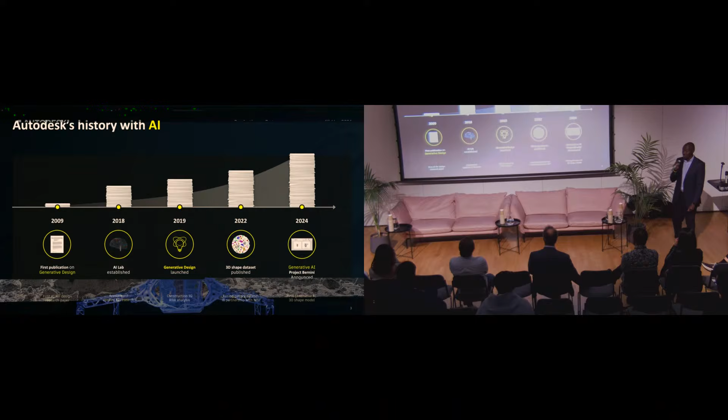Autodesk has a long history of developing AI. While it might seem like a new technology in the architecture, engineering, construction industry, we have been exploring what AI can do in product design, in building design, and other domains, including media and entertainment. We've got over 15 years of investigation and publishing papers as well.

In 2009, the first publication on generative design was released, and this was very much the beginning of a lot of the work and focus. Then in 2018, we created an AI lab, which was the beginning of accelerating a lot of our AI investigations, specifically for design and make.

In 2019, the first generative design capability was released, and this was Construction IQ, to assist with risk analysis and safety via the BIM 360 application. We've since released other generative design solutions, both in Revit and in Fusion since then.

In 2022, we published a public dataset - the Fusion Gallery dataset, in partnership with MIT. Again, this is work that came out of the AI lab.

Fast forward to 2024, the first 3D shape generative AI model was released, at least as a research project called Project Bernini. This was a publication that was then formalized as an actual working solution and demonstrated in some of our external engagements. Now we're obviously in 2026, and a lot has changed in just the last couple of years.

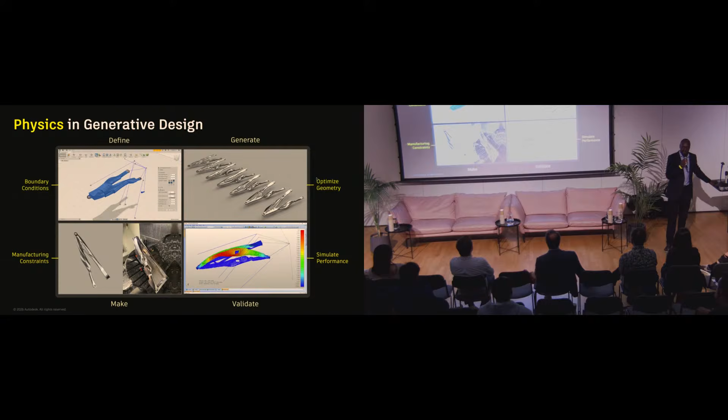In this case, generative AI is assisting with preserving accuracy and, in fact, improving it in many cases. So you can get your work done better and faster, certainly, because it takes a fraction of the time to generate constraints versus doing them by hand. Consider that performance is a key contributing factor here for generative AI.

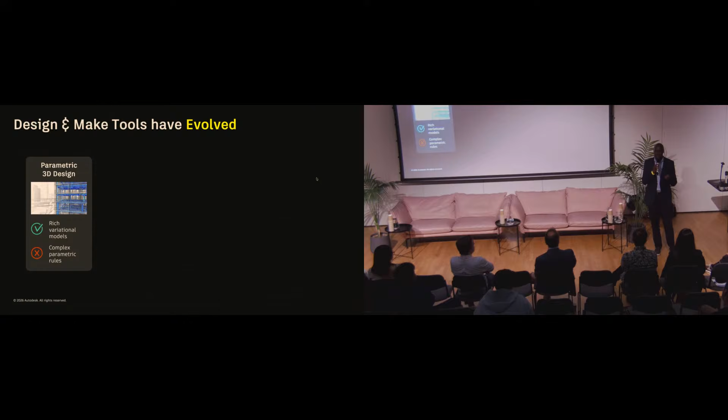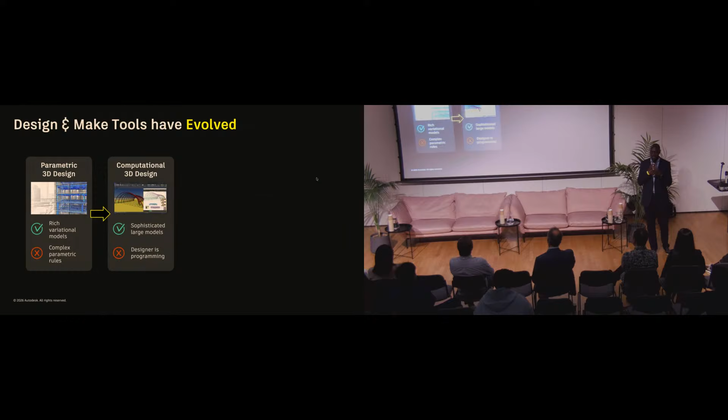But you had to define parametric rules, like in the auto-constraint method, defining edge lengths, equivalent ratios, and building up all these rules to create fairly complex geometry. We then moved on to computational 3D design, where you provide programmatic rules for how to create geometry. This is like going from maybe 20-30 years ago to 10-20 years ago in terms of the technology. We can now create very sophisticated large models, but as designers you need to learn how to program these types of rules. So the designer is still programming in this case.

You need to really understand deeply how to use these tools, which unfortunately leads to a situation where not many designers have taken this on because it's very complex. It only appeals to specific advanced engineers who can really leverage this tool to the max. But herein lies the opportunity, right? As AI powers 3D design, we're now in a situation where you can leverage AI to analyze what you're doing.

AI can automate some of the processes, like the auto-constraint step, and also augment your capacity. You're now able to work much faster as you combine these tools together. With generative AI combined with generative design, you're getting performance and productivity gains, as well as performance geometry out of the system. Together, you're able to work a lot faster and improve what you're doing. And importantly, with generative AI, it's a very interactive but very natural approach to doing design. So that's the path we're all taking - software continues to evolve, but this is where we're at today.

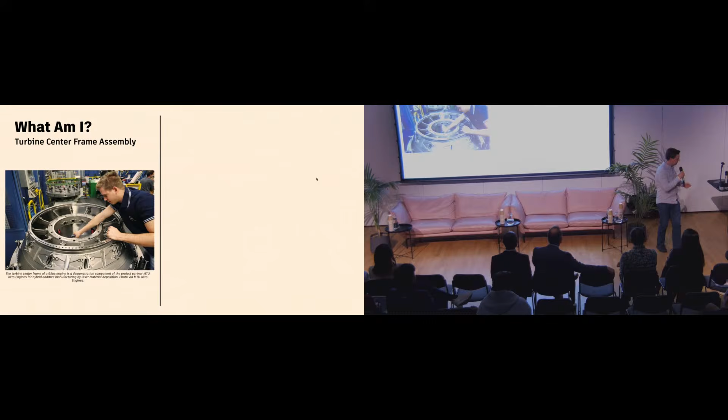This is where the turbine center frame is located. It's located towards the rear of the engine. It holds the high speed and low speed spools together. It has a very high precision bearing in the center. Around the outside, some of the components that are not shown, but you can see those struts in the middle. There's some ducts that sit around the outside. Those feed air into the center and oil to lubricate and cool the center bearing.

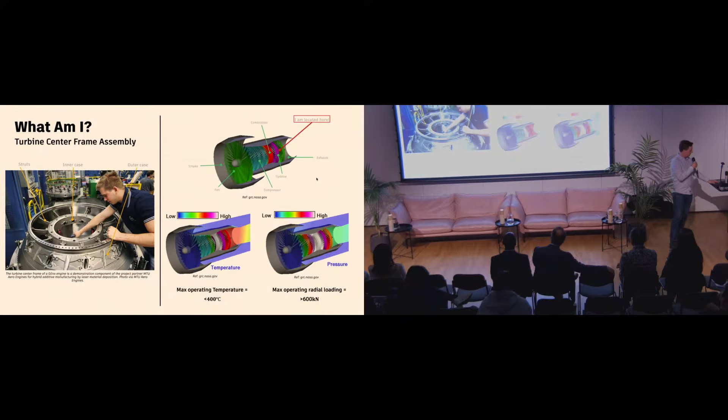You can see here where the component is located towards that rear section of the engine. This is the stages we went through. We got loads of requirements, models from MTU Aero Engines. We wanted to look at how we can apply multi-physics generative design to this. So we're not just doing structural analysis, we're doing thermomechanical, we're doing CFD analysis, and we're trying to combine it all together into one system.

We had to go and build this component, test it. We worked with the universities to do that. We did some proper aerospace level testing as well, because these guys can test parts for jet engines. And then we go and build it. We built this whole thing. You'll see it at the end.

We went through a number of design iterations. We had to evolve the design slowly - build it, design it, simulate it, build pieces of it, and then test it, learn from that, and then improve the design iteratively. And as we went through each stage, we met more and more of the requirements until we got to the end, where we met all the requirements.

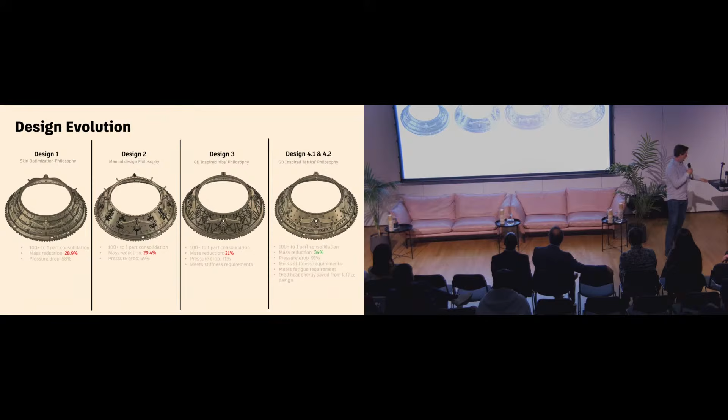The first stage was to look at some generative design. We wanted to understand a little bit more about the structural performance of this. Can we add - where do we need to add material? Where can we take away material? And this is where generative design suggested we could add some material to this component.

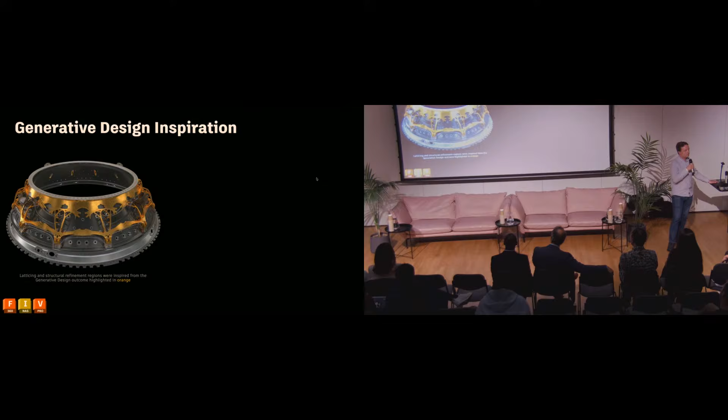You can see the structure there where it's added some material towards the bottom. Actually, later on, I'll show you that we actually made this a bit of a sandwich panel, so that top section of extra material just got absorbed by that sandwich panel, so it wasn't needed.

We added a lattice. This is a really complicated lattice. It's a double conformal lattice. It conforms around the shape and at the angle of the shape. And the lattice is also optimized - it's varying thickness.

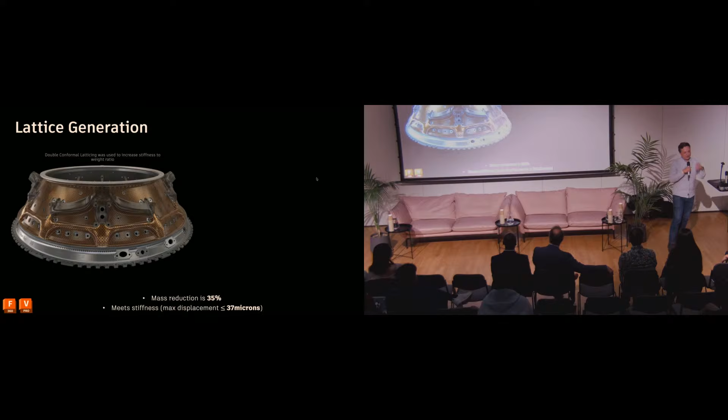This enabled us to get a mass reduction of 35% compared to the original component. It met all the stiffness requirements. This is the over 100 components merged into one that you can see here. When you do that, you merge a lot of functionality of components together as well, which is why we had to take this multi-physics approach.

There's a close-up of the lattice structure. You can see right in the middle there it's optimized. It's varying thickness.

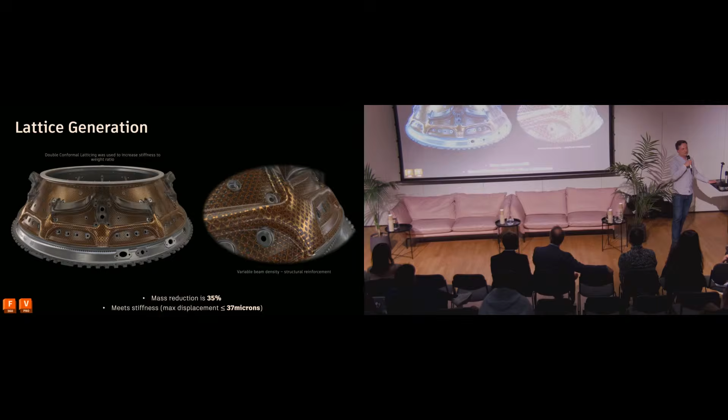We had to do some extra analysis on this, as well as the structural analysis, to work out the displacements. There's a fatigue requirement as well, so it's thermomechanical fatigue testing we had to do for this. It's basically as it heats and cools during its flight cycle, you grow cracks slowly. So you want to make sure you don't grow them too large before the end of the life of the engine, or the expected end of life.

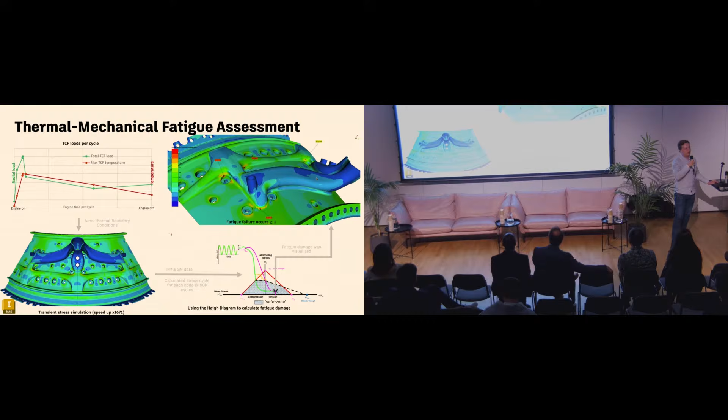So yeah, it's a cyclic load that increases and adds tension to the material.

Okay, so this is the next kind of physics, CFD. We had to do some generative fluids. This was actually the most prototype tool that we had that is now in the product, but you could do fluid optimization. We had to do a lot of testing for this because originally it was designed for mold tools, for liquids. We wanted to adapt this to now work with air, so we had to do a lot of learning and gather a lot of data to improve that solver.

You'll notice that section is actually attached to the body. In the original part from GE, it's not, it's just floating - it's a parasitic weight that adds nothing to the structural performance. So we've combined it on there to make it easier for additive manufacturing and also add to the structural performance of the component.

We got a pressure drop reduction of 91% because we've got a nice free-flowing shape, with very few eddies and turbulence within that volume that you can see there.

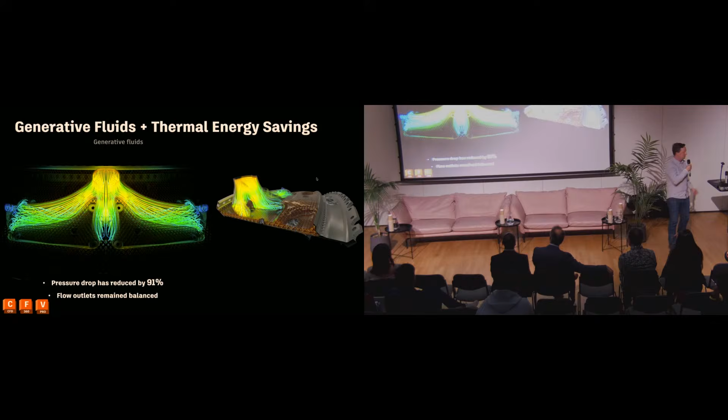And then the last bit was this sandwich panel that we added. It's really good for additive manufacturing, especially with a powder bed laser process, so you get a lot of heat in there. If you use thinner structures and lattice bodies, you reduce your distortion. But it also, in this case, because it's really hot on the inside, it reduces the energy loss through the casing. So we saved, over the lifetime of the engine, 16 gigajoules of energy.

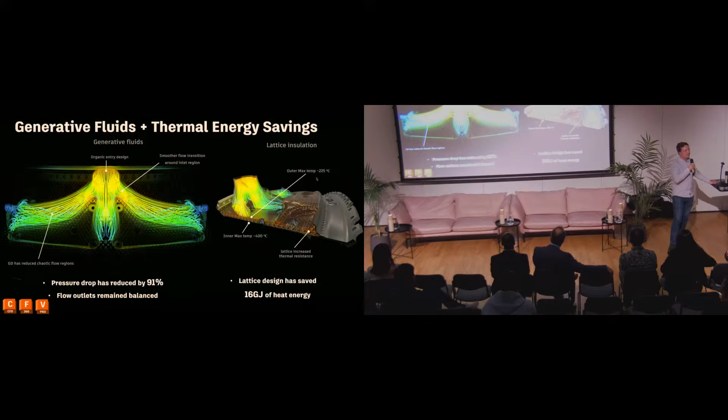And where we need to tweak things - what information can we pass back to the science team that are working on the solver to improve their stuff, to make it work better with air?

It's a very loud test. I do have a video, but not here. It'll deafen everyone.

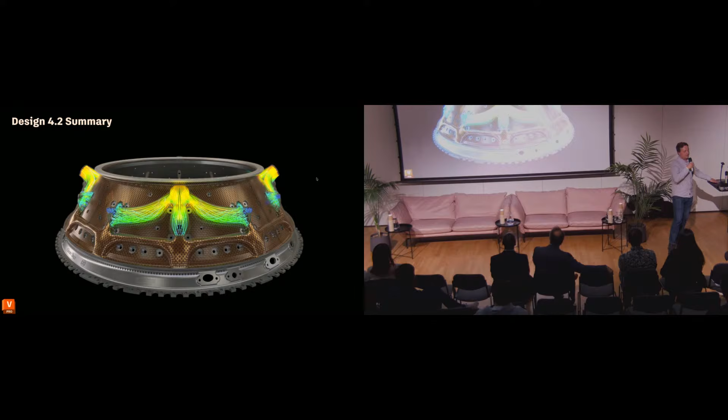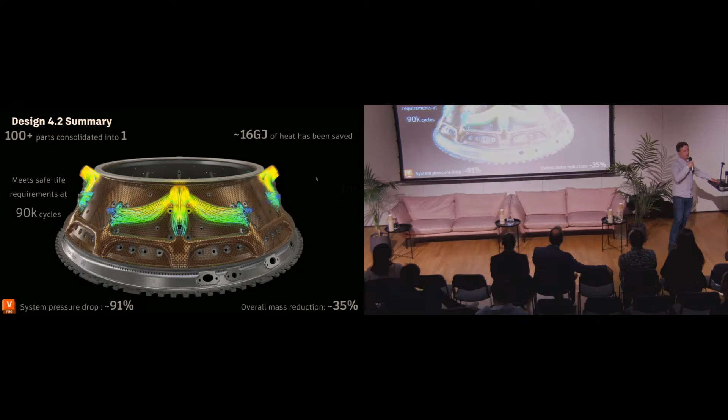So yeah, that is the overall design that you see there. They made this - it's 1 meter in diameter, completely made out of Inconel. So it's 100 parts combined into one. Mass reduction of 35%, system pressure drop 91%, so you need a smaller pump for the air. It met the 90,000 cycles fatigue test, the mechanical test. 16 gigajoules of heat was saved, and we printed it.

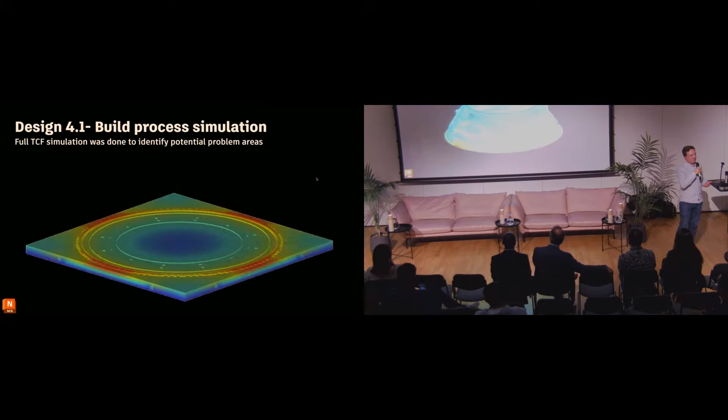So yeah, we simulated it - this is the biggest simulation we've done. We needed quite a powerful machine to do this, because at 1 meter by 1 meter diameter, 3D printers in powder bed metal didn't really exist at this point - they were prototypes. There are bigger ones now, but yeah, we simulated the whole thing. We took all the learnings from what we'd done before with our testing, and used it to inform this bigger simulation.

And we actually printed this first time - we did not expect it. This is the biggest part GE had ever made at that point, and it printed correctly first time. That's the one you can see there on the right-hand side. Completely Inconel, completely metal part.

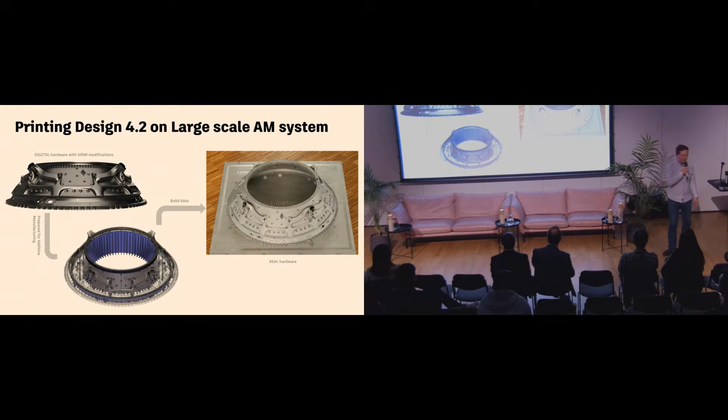So yeah, just to summarize: we start with design, we do simulation, we do testing, and then we try to learn from that. We all learn for science, for industry futures, and for research engineering.

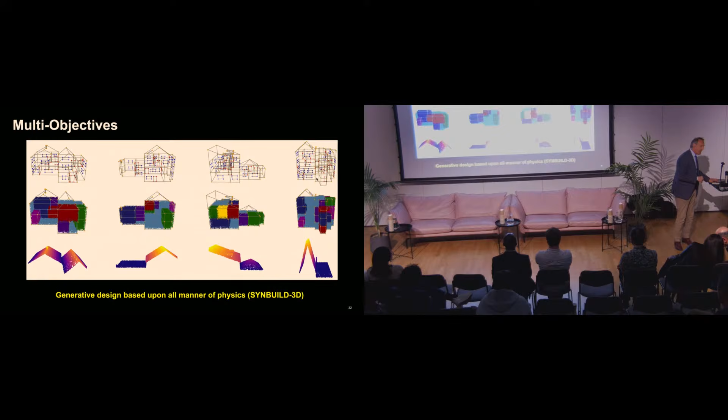These live in a real world eventually. It's one thing to make a picture, it's another thing to say, yeah, but this has to hold a certain amount of weight, a certain amount of people, here are its uses. And so part of that is the story around physics-informed AI. I want to give you one example of where this kind of technology, I think, is really needed.

This is the Barcelona Supercomputing Center. It's very new, at least for science people. It's a really great building. I always hold the standards for science people a little bit lower—there are lower standards when it comes to creativity, as you'll see in a minute. When you talk to real artists, it's like, oh, that's pretty boring, it's still a rectangle. But it's nice, it's got glass. If you're a scientist in there, you're super happy because you're in a nice building.

But here's one of the architectural gems they imagined for this. On the second or third floor is this beautiful deck. The idea was this is where all the people come and hang out, have coffees and lunches. And guess what happens in Barcelona? Anybody who's been there knows it gets super hot, and this is right at the base of the hill. So around 11 o'clock, noon, it starts heating up, the wind starts coming down, and this is actually a wind funnel. So what was supposed to be the architectural gem where everybody's gonna hang out—nobody hangs out there.

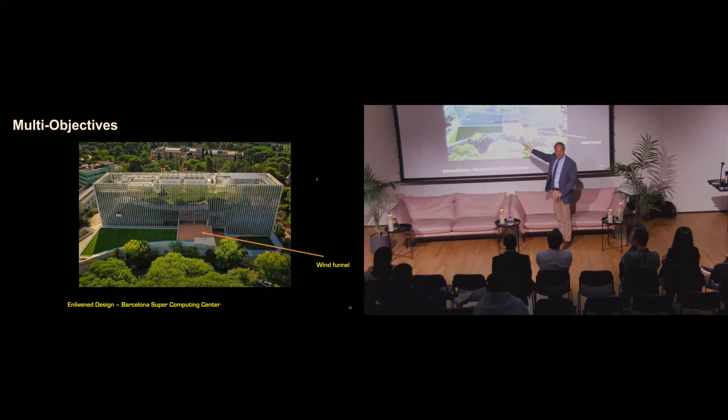Because if you go out there, you're just getting blown off, right? So nobody has coffee there, nobody has lunches there. This is where everybody was supposed to go and hang out and have lunch—nobody does. Why? Because when you built this building without understanding the environment you're in, or that it's not just forces, there's wind and so forth, you built yourself a building that actually failed in what you were actually trying to do, which is to create a space for people to interact.

And in fact, that prompted this group, the Supercomputing Center, to start doing simulations of the wind flow over the entire city of Barcelona. This is exceptionally expensive. But this is the heat—these are buildings, this is the heat coming down from the mountain. And if you've been to Barcelona, you know how hot it is. And guess what, sometimes you've engineered your spaces so that all the heat gets trapped. So Barcelona is hotter and hotter, so you don't go in August. Barcelona's super fun, so it's always hard to say don't go to Barcelona at any time, but you don't go in August because you get caught in these things, and then you kind of melt, right?

And again, this is all something where in modern engineering and AI, physics rules, we can come to this and start addressing it. There are ways now to say, I want to start thinking about my design—it's going to live in that space. How do I use the wind to help cool my building? How do I use the wind, but not create spaces where I'm putting people in like a vortex?

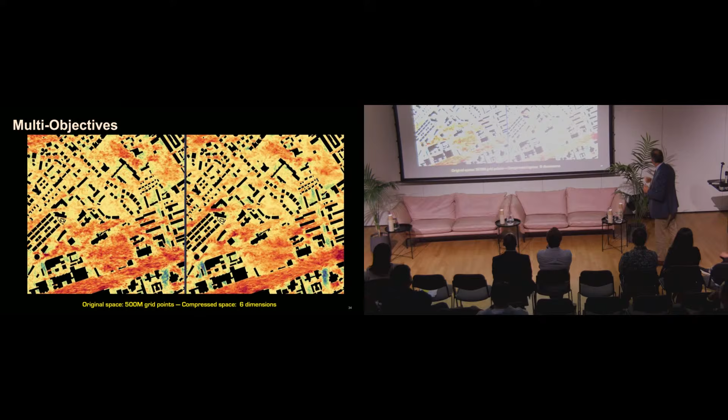So that's what we're going after: using physics, embedding it in our AIs, so it's a very smart agent. It has Newton capabilities, right? But at scale. Newton could only do pen and paper work, he had no computer. This can be like Newton with massive power, and so we're going to bring it to you.

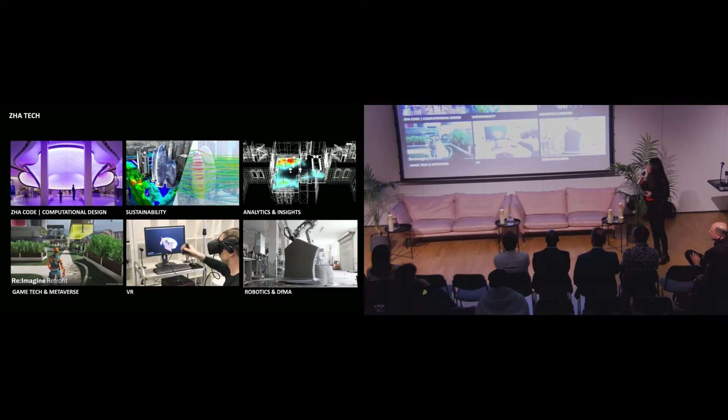So this is us. We are now about 500 people coming from more than 50 nationalities, different countries. And we are divided into 3 main clusters, but we are supported by specialist groups. Their research is informing not only our competition entries, but also our build projects.

So for example, Zaha Code, the computational design team, mainly focus on engineering logic, then sustainability, analytics and insights, which I'll elaborate a little bit later. We also work on the metaverse realm, of course, and virtual reality, and we have on our premises a robotics lab.

So here I'm just showing you the wide breadth of our expertise, and the reason I'm showing this is to express the sheer volume of questions that we need to ask ourselves every single day, whether it's an airport or a bridge or a tower or a villa or a chair. We have to be very creative, and we have to find creative solutions tailored specifically to each brief. The main parameter of the whole design process is the brief. What do you want to achieve? And the parameters are basically the climate, the location, and what the client wants, which is the brief.

So gravity and creativity. Our relationship with gravity starts a long way back, and it's defined actually by defying it. So the first project that we actually built is the Vitra fire station, if some of you know. And Zaha introduced here the first huge cantilever. I will just show a few more examples.

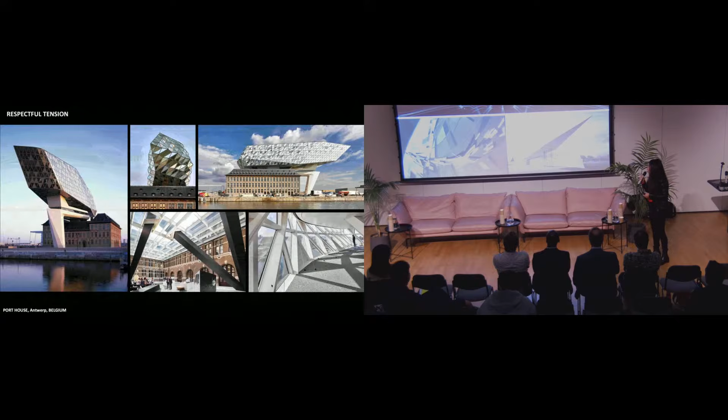For example, the port house in Belgium. In this instance, we were asked to design the headquarters of the port authorities. And we decided to actually place this huge diamond on top of the existing fire brigade. This is a 110-meter long element, and the way to achieve this design aspiration was by collaborating with the structural engineer very closely.

So we introduced these kind of protruding large legs, but that was not enough. It did minimize the length of the cantilever by about halfway through, but we had to brace back that leg into the existing courtyard and introduce diagonal beams which transfer all the loads down to the ground. And the next example is of a skyscraper, the Leeza Tower in Beijing.

If you ever explored a floor plan of a skyscraper, you will normally find the core centrally placed, because that's the most efficient way to design skyscrapers. In our case, we wanted to invert the logic and create a huge atrium that would give a more poetic feeling to the space. We achieved that by actually splitting the core into two.

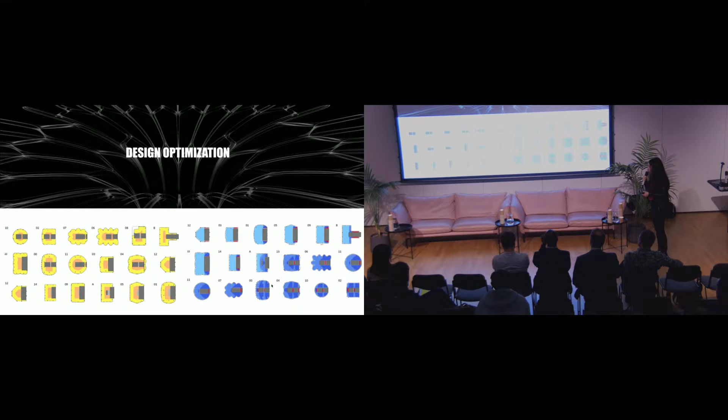Design optimization is not new to us; it's part of our normal day-to-day work. Here you see a core study, exploring different positions of cores in relation to different floor plates, while also exploring different opportunities for facade designs. On the left you see a few of those explorations. At the same time, we're looking at floor plates which are really irregular, like the Soho Galaxy.

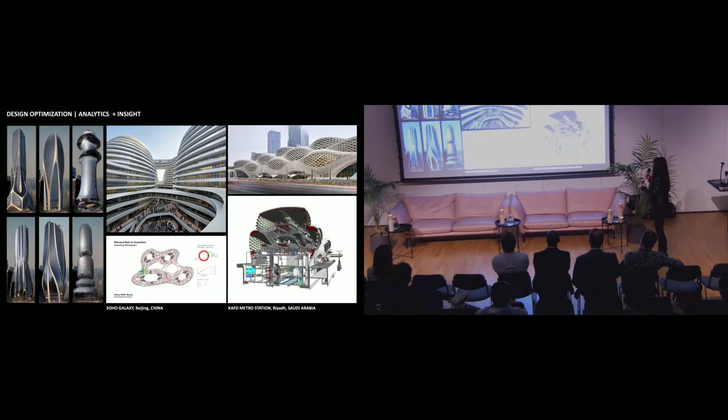With the help of the Analytics and Insight cluster, we analyze the position of the desk in relation to the facade, how much daylight each employee receives, the distance to the entrance, and the levels of interaction between people in public spaces. All this information feeds into our final design, along with the BIM in Revit, where we work on complex buildings and integrate all required systems, including mechanical engineering.

All the massing is oriented towards the north in order to maximize the amount of wind that cools down the whole complex.

On construction efficiency, we're looking at Bee'ah, a smaller project, 9,000 square meters in Sharjah. I'll talk about one aspect of it. The geometry is super curvilinear, with millions of double-curved surfaces in theory. In reality, achieving it on budget and on schedule meant dissecting the whole geometry into a grid of 2 meters and cladding it with only flat panels. This geometry was achieved with just GRC panels - glass reinforced concrete - so it was super efficient, but the design result is quite spectacular.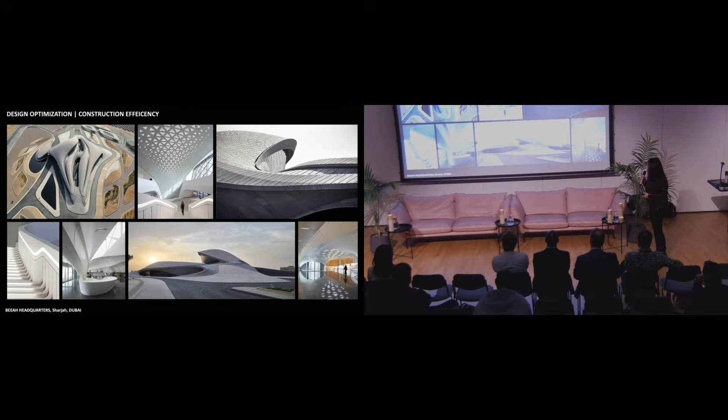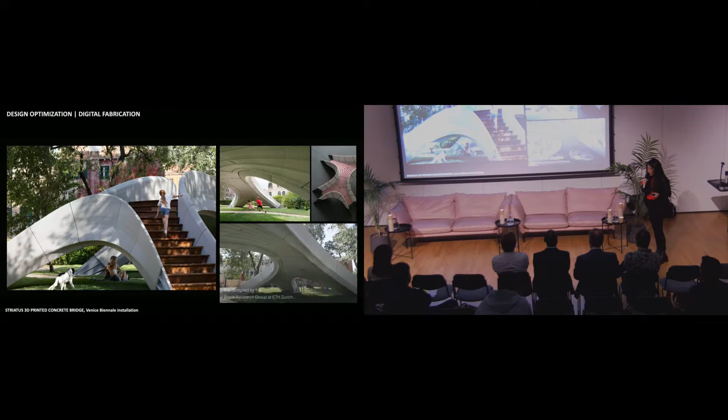We also look at material innovation for new forms and structures, swiftly shifting to AI. It gave us a huge boost of creativity, but also a huge boost to rationality and intelligence. When we work on complex projects at this scale, there is no room for regularity. We actually desire irregularity and differentiation, but all the different conditions need to resonate and come together into one unified system.

We are working to understand the world of 3D design and generative AI, because it helps us simulate and understand if we can achieve our design ambitions in a more efficient, faster way. I'd like to add that existing tools can assist us on a portion of the process, not the entirety of it.

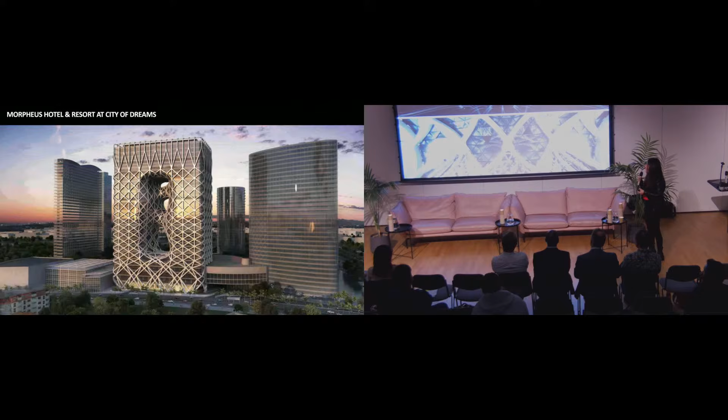For the last project, I want to clarify again that we always develop a system from macro to micro, looking at it holistically. This project is in Macau - a 150,000 square meter hotel, and this is the first free-form exoskeleton steel structure ever built.

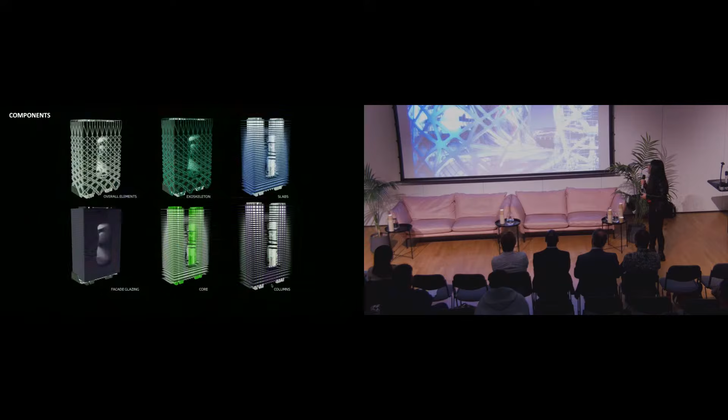The methodology involved a comprehensive collaborative 3D model that tested and analyzed the structural integrity, rationalized the architectural geometries, and manufactured the facade components. The underlying diagram is simple: two cores connected by a podium at a few levels, with two bridges on the upper levels, a system of slabs and internal columns wrapped in cladding, and externally the exoskeleton. The exoskeleton gives us huge flexibility in designing the floor plate, a big advantage for the client's requirements.

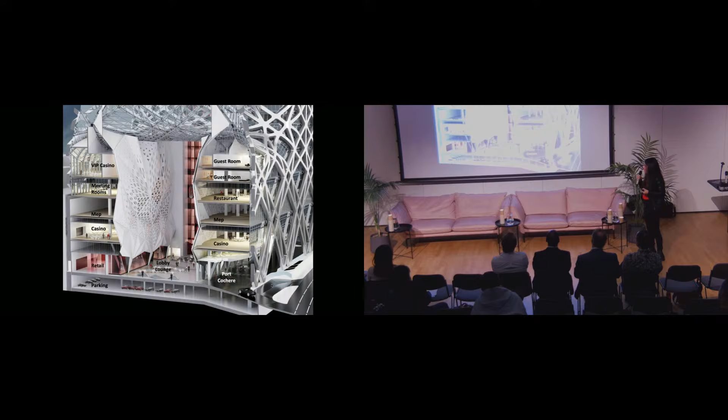These podium levels allowed us to open up the lounge into an atrium spanning over 40 meters high, creating a special event as you enter the building. It was important to create visual connections and penetration of daylight into this space, understanding its three-dimensionality. On the right-hand side, you're looking up at the soffit of the bridge, so you experience interior and exterior together as you pass through spaces in the panoramic lift.

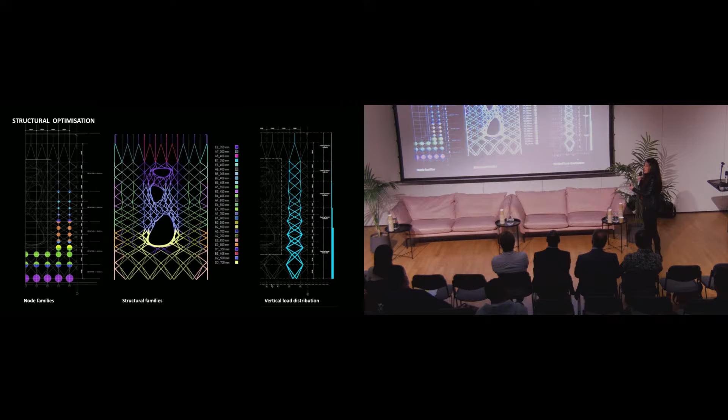The first part of the design process was structural optimization. We started with the structural engineer analyzing the structure, dividing it into families, and defining the rules for each, including the node family. The most important was the vertical load distribution - this diagram defines not only the structure but also the architecture, as it's the most efficient way of transferring load through the facade.

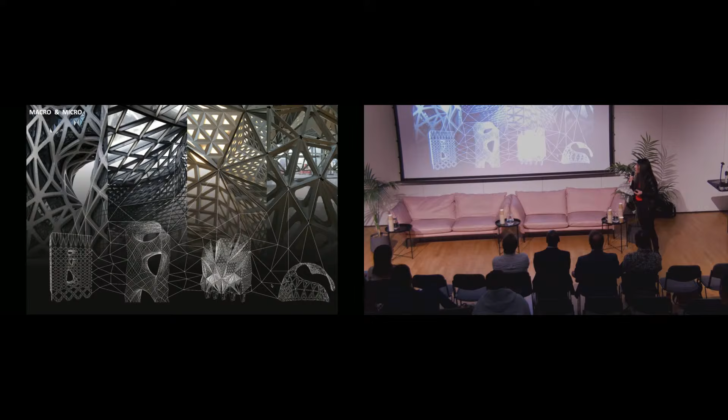To finalize, we try to develop our language so it works holistically from the facade, the structure, interior design, down to the level of furniture, in order to create a rich and intriguing human experience. You'll see it here.

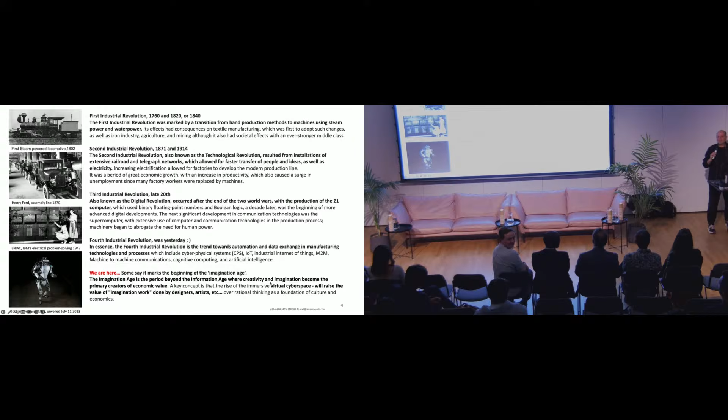Thank you, Anat. Please, everyone - some of my students are disappearing. Write some notes, it will be nice to have a big discussion at the end. I think you demonstrated the volume and need for what the two Andys were talking about - the durability, Andy and Nathan.

I'll show only three projects, but first I saved some very old renderings for friends in the building - Sia, my old business partner who worked with Tony, in the old days. This is 20 years old. Sean Hanna as well, the architect, is here with us.

This is just really quick - I'll run through some images. This was one of the first times we used a little software called, at the time, Complex Matters, later developed within the lab by Tony and Sia. It was just placing units within a voxel grid based on stress loads - that was the promise. This is how we all actually met 20 years ago.

So I found this picture that was a messy rendering from one of the simulations, but I loved it because it was so real. It showed the vulnerability of the software. I really love that little thing.

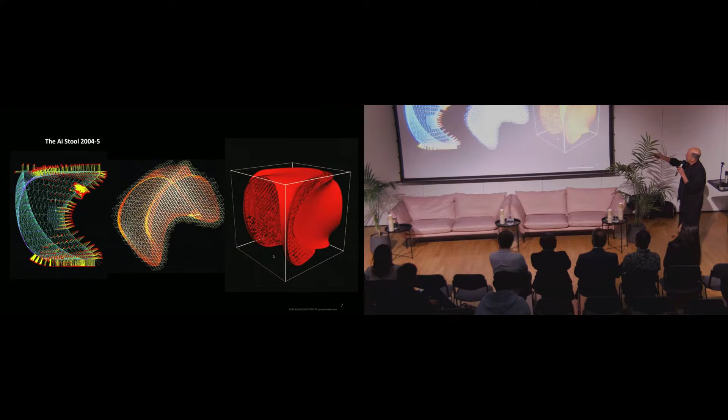These are just a few old slides showing the voxel grid and so on - the Osteon chair. What's nice about this is that it was the first time to actually bring in the notion of infill. There was no infill before. I don't think we were aware at the time, but there was no infill. So this was really the first infill, basically structure growing from the inside of objects, not around objects as support.

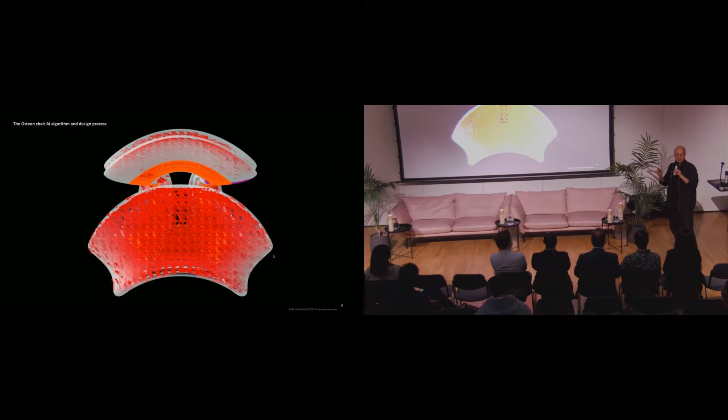Still actually quite clever. So goodbye, it sits in a nice museum. Actually, it's in the Barcelona Design Museum permanent collection. And the stool, I think, is in the Red Dot Museum. So they sit in nice places.

I just wanted to take a moment to talk about where we are in history right now. This resonates with me very much, moving from information age to imagination age. I think as designers we experiment - we sometimes talk to engineers and calculate things, but most of the time we experiment, and we reflect, and we go to the next permutation or iteration. I realize how valuable it is for all of us to use that methodology when working with agents.

That bottom line is really interesting - creative currency coming from imagination, knowledge, gained experience. I would like to call it H to M to H, human to machine to human, kind of industrial loop. M to M, machine to machine, is an old term now actually - machines that talk to machines that talk to machines. These are the forms of production: form, pour, cut, join, finish, grow, additive.

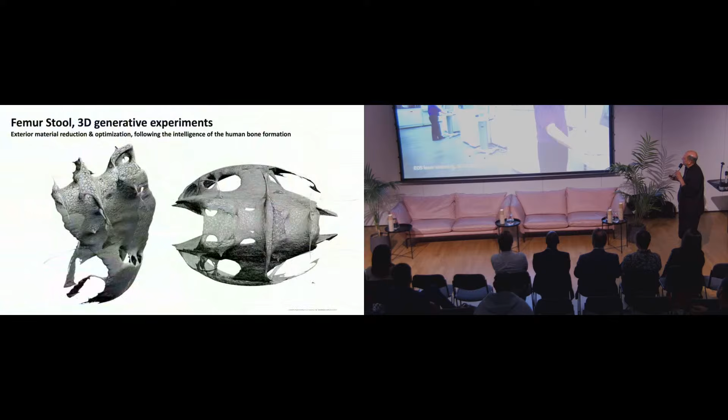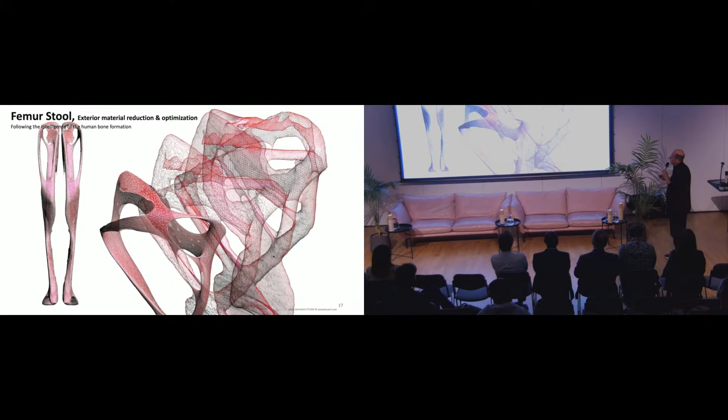This is again a failure that I love to keep from an old project for the Femur Stool that today you can see a similar approach actually in Fusion. That was with Altair a long time ago, using stress loads to actually vacuum out or remove material.

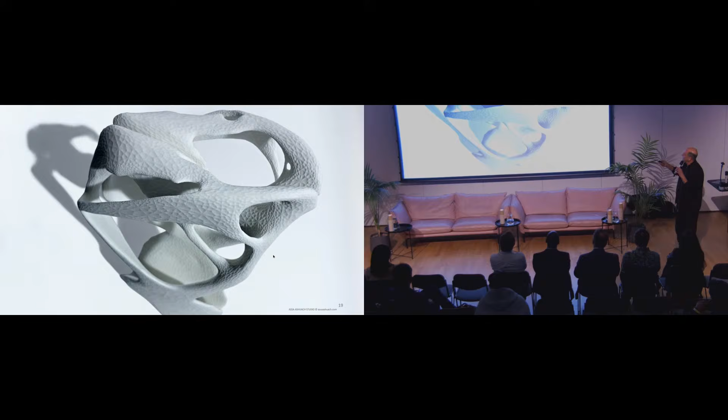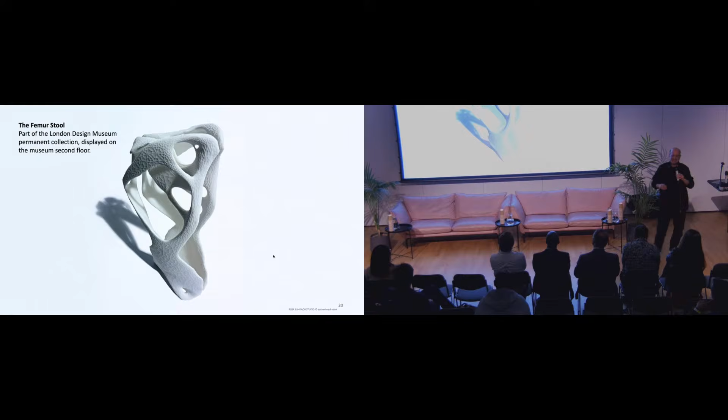I'm showing this object because the math kind of took us towards bone formation and why bone looks like bone - a little bit of a natural selection fast forward. Some of you know this project. It's at the Design Museum permanent collection now, so you can see it there. Sorry, I'm not showing off, but for me the interesting thing here is that the math took us towards bone formation.

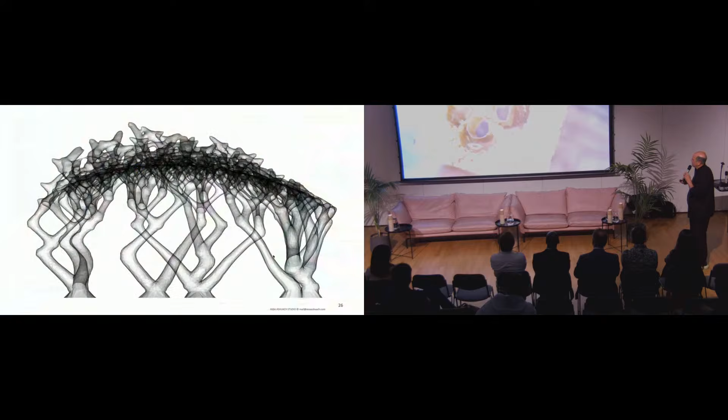This is another project from my collaboration with KIT, Kyoto Design Lab, looking into the microscopic landscape of bamboo, the way bamboo grows. We used CT microscopy to study geometrical topologies of the natural microstructures, then made it into 3D, producing samples and creating a generative process that mimics the bamboo's bio-intelligence, let's say. The basic proposition was that we only use cylindrical form, so it's empty and very lightweight - kind of hollowed infill, if you like, but smart in some way.

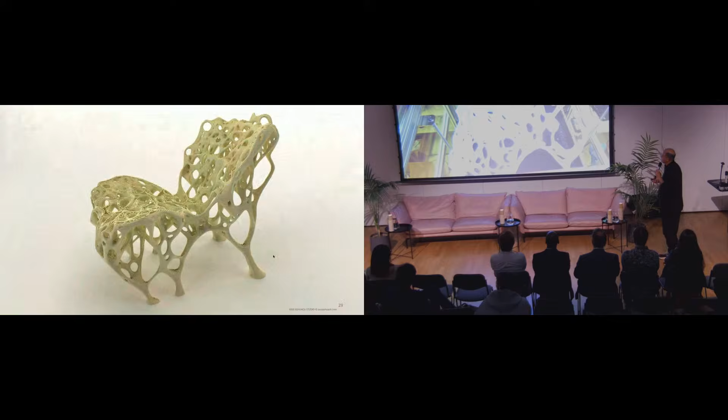Why is it interesting? It's interesting because it reduces material consumption to a minimum, and energy as well. So it's like trying to hold weight with minimum material - same old kind of exercise.

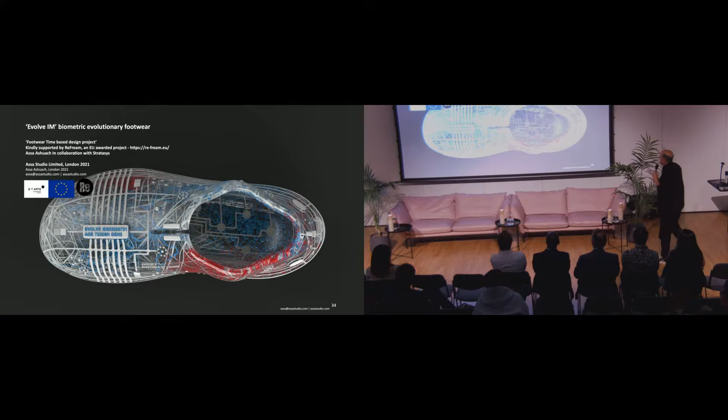Very quickly, going over to one of the latest projects that I think is relevant is a digital twin footwear that is inspired by nanofibers, the way leather is formed. Leather is a consumable good, but the human epidermis was one of my inspirations for the project. Here you can again go back to the microstructure, but it's collagen fibers growing to perform in a certain way based on natural conditions—sweat, humidity, gravity, expansion, and so on.

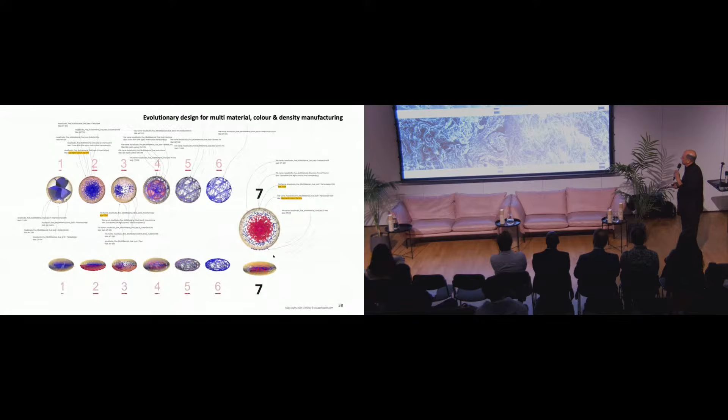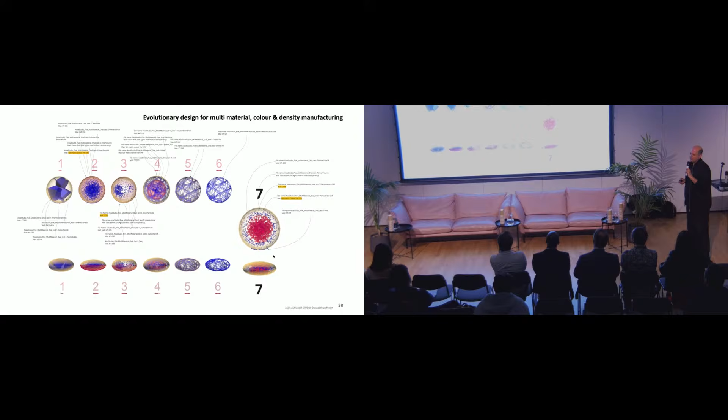In this project, I worked with Stratasys, and Stratasys is one of maybe the only companies to really produce real multi-material, multi-density, multi-color, multi-opacity printing. And if you have that manufacturing technique, then how do you work with it?

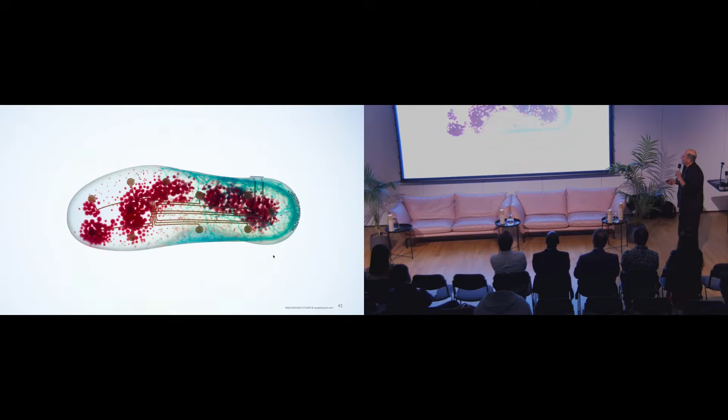The challenge here was to create a full living digital twin that understands physics, understands forces, but also gets sensor data streamed live from the physical object. So if you work with the first generation, you send information to the second generation in the cloud. In this project, we built up a quick mock-up of a physical environment for the digital twin that takes sensor data into modification and generation of objects.

I don't have animations here because we don't have too much time, but the particles are just shrinking and growing. They're full of gel, so they're gel particles. We have 1,000 particles inside. They start as 2 millimeters, and they just grow under your foot.

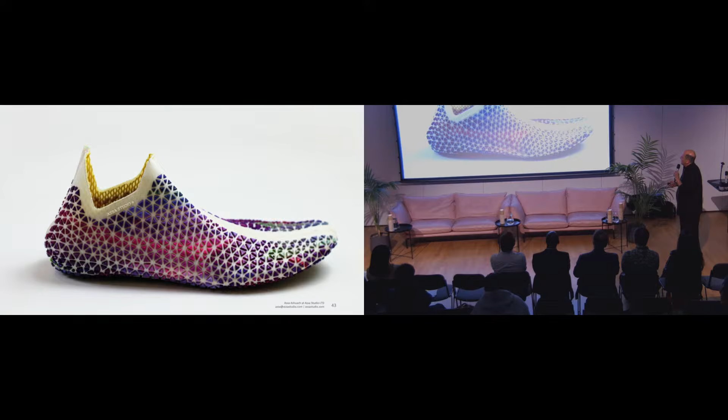Some more examples of multi-material and print on fabric. But the interesting thing is that there's an age for the product—it has an age and a generation. In this case, it's Gen 2, and the age is 733 days. The basic proposition is that with time, objects will improve, in this case in the virtual reality or virtual environment.

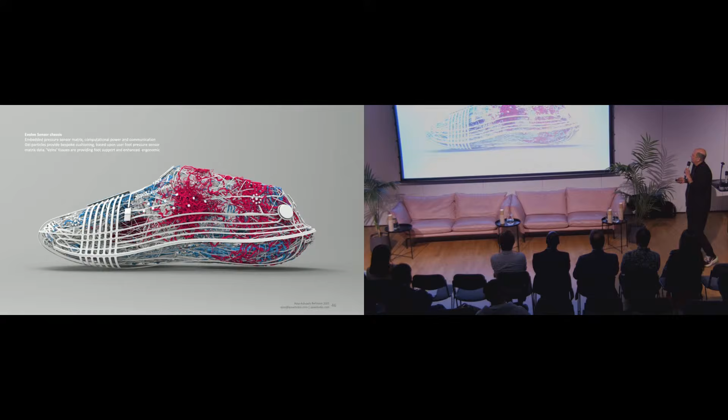This is the first good prototype we actually fabricated after a lot of experiments. In this case, we only had 5 different materials, like a translucent rubber wrapping around the intricate network of multi-density fibers and gels. The fibers are supporting your pronation—how do you say it—and the gels are supporting a bespoke cushion.

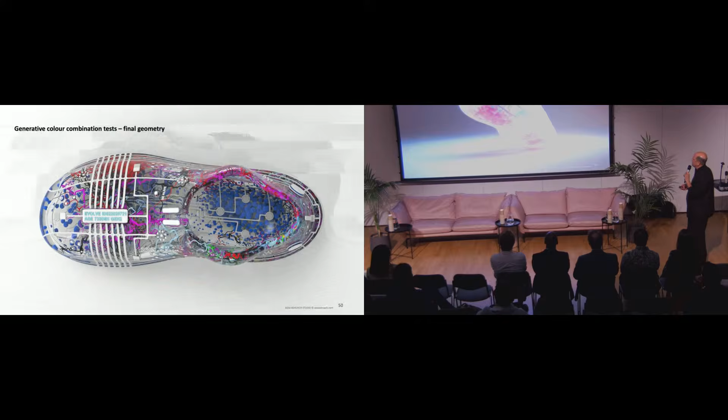There's also air knobs for ventilation, and the object, from the sensor matrix, learns as it grows. The white is a conductive circuit board filled with silver. This is a full prototype for photography with no electronics, but the sensors are mimicking the position for the sensors—in the real model, they're fully functional. So there is, in this case, humidity, heat, and pressure sensors.

And of course, here you get the full spectrum of machine color, like CMYK. So you can reach full color capabilities—how do you deal with that? It's not very straightforward. I realized that 3 colors are easy to control, 5 colors are easy, but 200 is very difficult.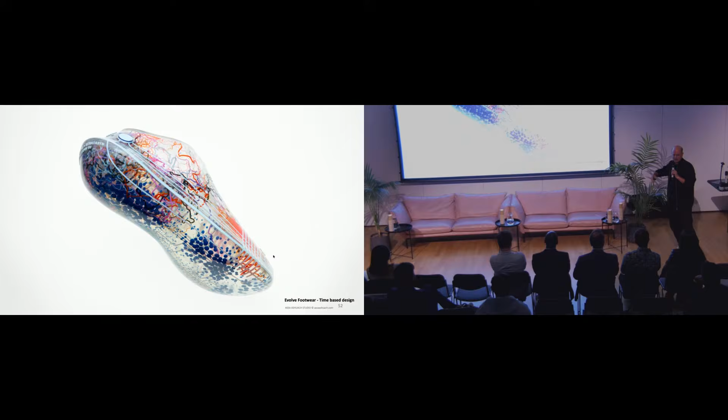Just to sum it up, the big question for me is: if we have the capability of simulating in virtual environments a digital twin—testing, growing, improving, and then fabricating—maybe we can add the element of time to the design process. Rather than just saying okay, this is the best outcome, let's go, architecture can study for several years for the next building to be improved nearby. So of course, footwear is a good example.

Just one last phrase from me, from Noam Chomsky: claiming that a machine can learn is like saying that a submarine can swim. It's an old slide again—maybe some of you have seen it before, but I love that phrase. So thank you.

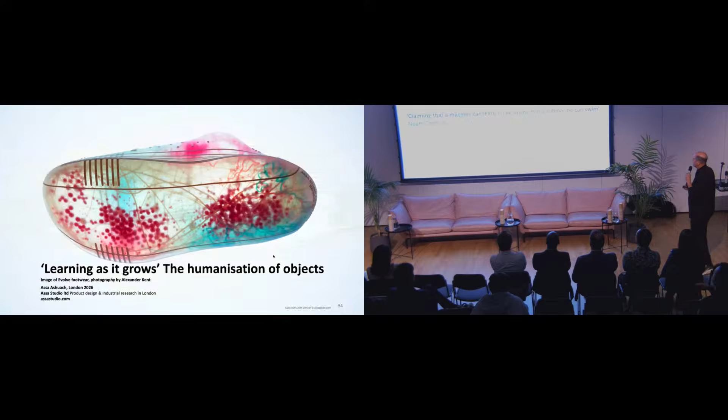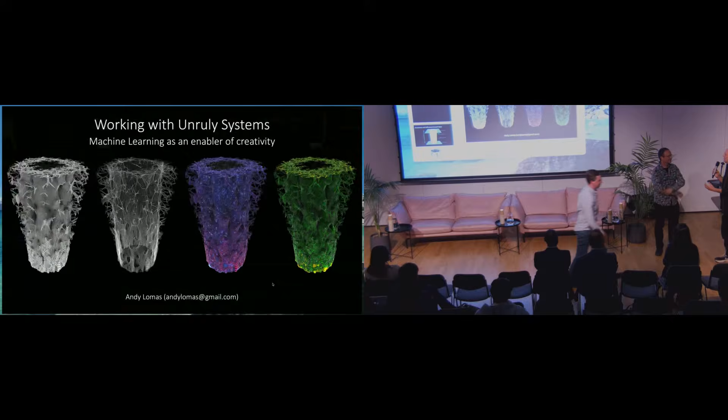And we are at the last but not least speaker, Andy Lomas. I love Andy's work. Andy is celebrating all the capabilities, all the tools and technologies we have in such a wonderful, free way—sometimes without gravity, you're using gravity as a brush in a palette, but not necessarily as a constraint. So thank you. Okay, well, sometimes as a constraint. Yes, so okay, got the clicker.

Cool, cool. So, yeah, I guess what I'm presenting is maybe a bit more speculative—essentially it's an art practice that I've been developing over many years. I actually come from almost a mathematics and then animation and graphics background, but I've been developing this art practice which has started to use more and more things like machine learning and AI sort of technology, almost as a way of not doing generative AI. It's not that the final images you see on screen are created using things like Midjourney, but how to find the rich, interesting, complex things—almost the core things I want to discover through my practice.

Machine learning and AI has started to become almost an essential tool to allow me to work with even more unruly systems, to be more adventurous as a creator, as an artist. I guess this is a version of, maybe not all physics-informed AI, but systems-informed, where the AI or machine learning is used to drive another system which provides a ground truth. A bit like physics engineering simulation, what I'm doing is more like biology simulations.

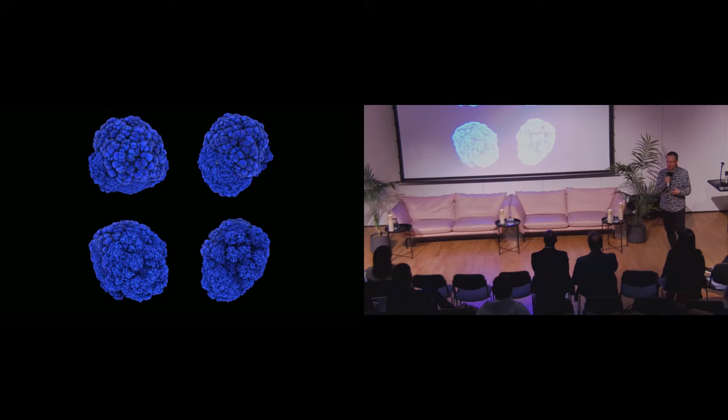I'll start showing one of my videos from a few years ago. What I'm fascinated by is the things you see in nature, from living organisms—crazy, rich, organic complexity, but complexity with meaning that you see in natural forms. Thinking about what processes those could have come from, rather than looking at the top-down structure, thinking about how this is created through processes of cells interacting with each other, cells growing—the biological processes. How do these forms and structures emerge from those systems?

This is computer code I've written simulating cells growing. There are rules about things like cells needing food to grow. Food can be created by light rays hitting the cells, generating food through simulation—light rays hit cells, generate food. When a cell has a sufficient amount of food, it splits into two cells. The cells exert forces on each other, like Newton's sort of cell forces.

So it's all rules creating behavior, which I'm hoping, if you get those rules and parameters of the system right, will make something surprising, emergent, richly complex. Most of the time it's probably going to go wrong—just sit there doing nothing, or blow up and go out of control. But hopefully if you get the balances right, surprising things happen. All the movement, all the form, everything comes from these simulations.

So basically it's about how do I discover the simulations, how do I discover the combinations—almost like a synthesizer of form and movement. How do I find the parameters that make the interesting stuff happen?

Sometimes I'm thinking about more physics-like things. What I'm doing is trying different rules, recoding things—learning by creating systems, then reprogramming it in slightly different ways.

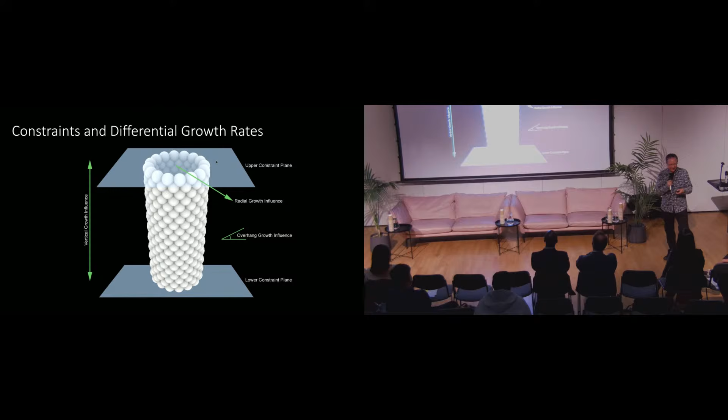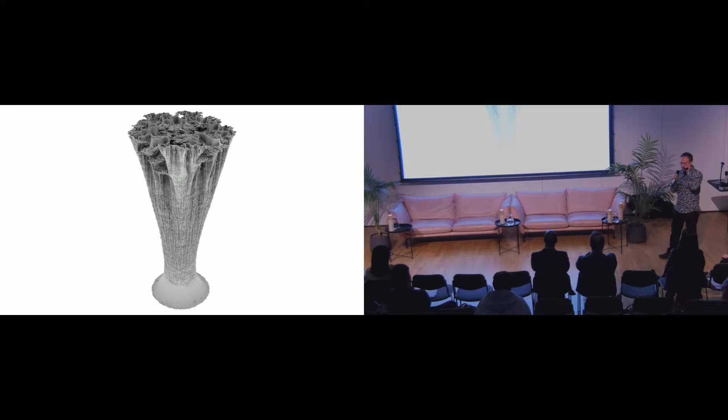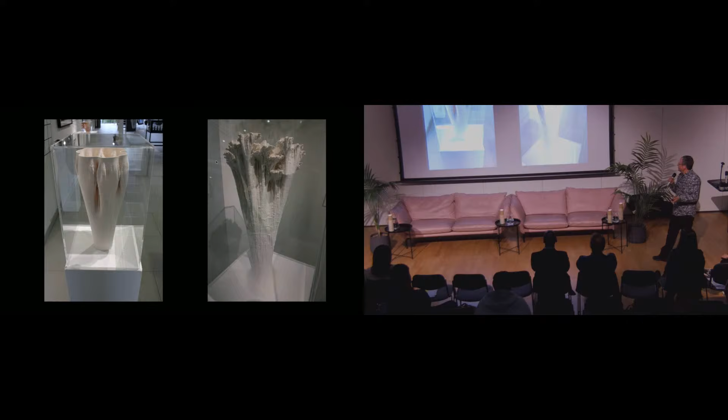To be honest, part of this involved quite a lot of iterations, a lot of things that didn't work. But after some trial and error, I managed to get things like this, which are 3D printable but still intriguingly complex and rich, and also quite structural—things with lots of grooves and forms, meaning they're surprisingly strong structures, like lots of things that happen in nature. These are genuinely 3D printable. These are some sculptures from exhibitions.

This is actually from an exhibition at the ZKM. And I guess one thing this also shows is that when I'm presenting this, I'm often trying to tell the story of the process as well.

I try to have these vase-like structures, which hopefully are intriguing sculptures in their own right. But there are also things in here like animations showing the simulation running.

There's a number of forms which are almost like a developmental sequence, going from an initial egg-like state to gradually getting more and more cells, more and more rich. So there are things in there which, if people are intrigued to read, hopefully start to tell the story behind them as well.

Because the process these are created by, that these come from this almost simulation of biological rules, is important to me. And part of that is that it's a process of discovery, finding these things.

So this is where things like machine learning start to come in. The backstory behind a lot of what I do is trying to find ways to help me navigate that space. How do I find these forms and structures? How do I tweak the parameters to find the interesting stuff?

A lot of what I've been doing is writing this system called Species Explorer over many years. One part of that research, almost an addition to Species Explorer, can do lots of different methods for exploring, creating different parameters and trying things out.

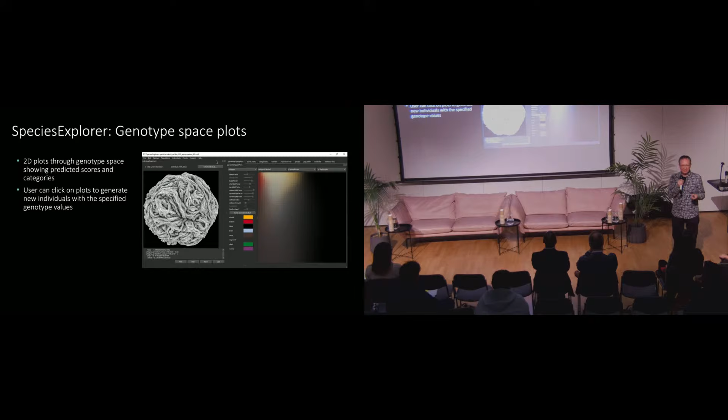It's also showing where it predicts there will be transitions, as we go from the red area to the light blue area. It might not be right, but that's where it's predicting there's almost a tipping point between one behavior and another, which is where I think particularly interesting things might happen. So this is an example of me using this.

So this was a series where I was trying to generate quite a few forms, and I started seeing these almost root-like structures being created. So I started, as well as scoring how much I like things, scoring how root-like the structures were. Then the deep neural network could basically try to optimize that, suggest points in the parameter space to go to where it's going to be even more root-like. It's almost like, let's accentuate it.

I didn't deliberately program it to produce root-like things, it just started doing it. That's cool, that's fun, that's interesting, it's surprising. Well, let's lean into it. Machine learning really helps me do that. Even though I've got too many parameters to get my own head around, by using a machine learning algorithm I can make it more and more root-like, more rich, complex organicness.

So it's almost like a real assistant to allow me to work with, as I put it, even more unruly systems. Be braver, I think, with these sort of systems, which produce surprisingly complex, interesting things, but are also really difficult to work with. Oh, cool, well the computer can help with that side too through things like machine learning.

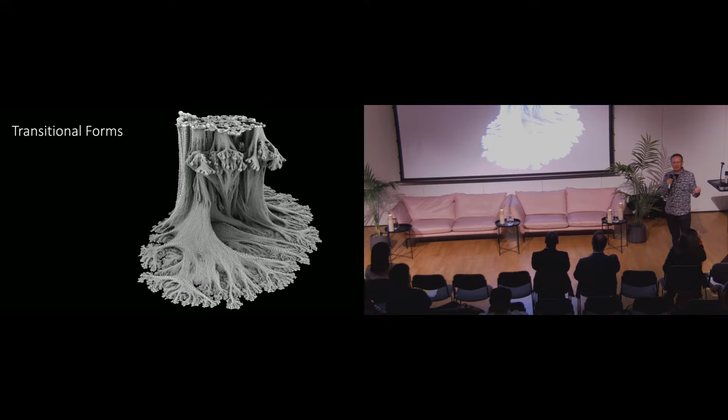It's basically a music video, but it's 13 million computer simulated social amoebae going through this journey through lots of different forms and structures, almost like a journey through the possibilities that their algorithm can emerge, things can emerge from. So I'm going to switch to the video.

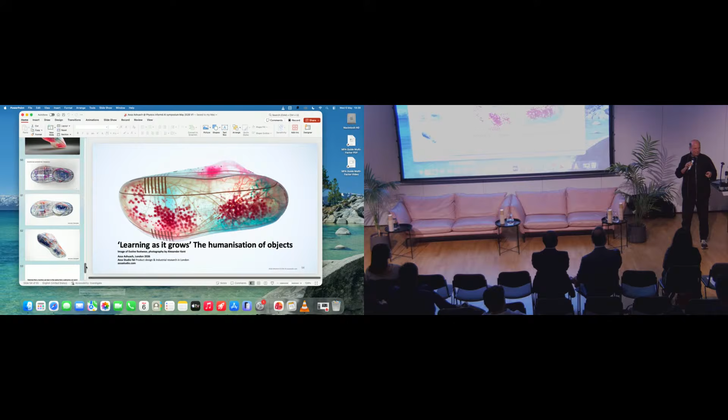I think that piece will be part of Max Cooper's new album. It is, yes, it's in his new album, and he's currently on tour. That's the opener for his set on his new tour, which will be released soon actually. So we're all looking forward to Max Cooper. Not yet publicly released as a video, hopefully coming soon.